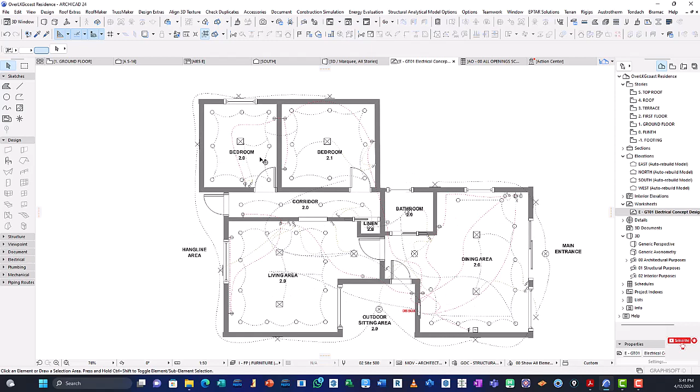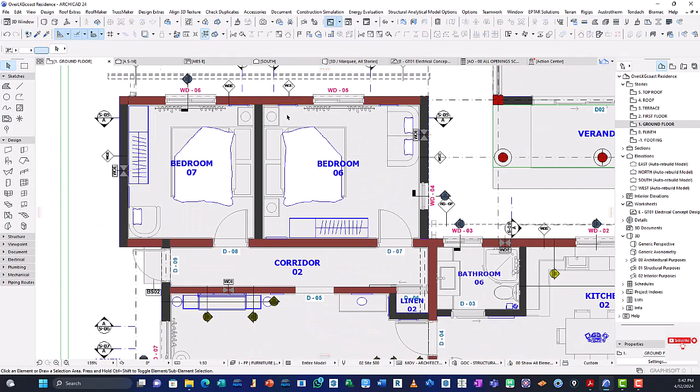So our agenda today: I don't want this video to be as extensive as it can get. I want to keep it consistent and concise. There's a lot to talk about for the past 3 months, about how the project has evolved throughout all this time that I was off, because this is what I left. This is the last session, the last time I closed the project. This is how far I reached in my work.

So we're gonna first start with this. This is a section detail. A section detail is a section that is mostly concise, limited. They're not like a simple architectural section. A section detail, as the name says, gives you just a simple detail, either of your window or of your wall, or, let's say, of your furniture.

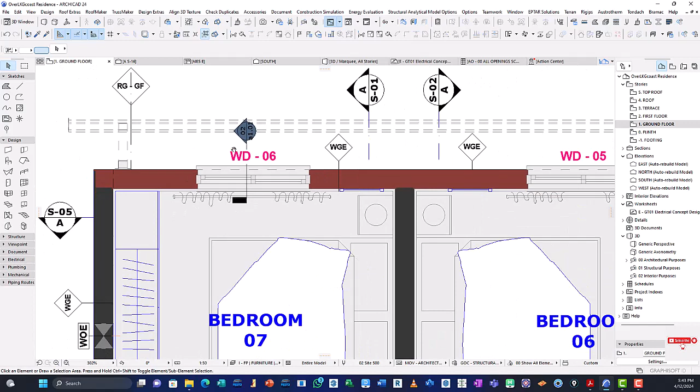So what I'm gonna do here, I'm gonna show you how I made it, because in ArchiCAD you're never gonna find a section detail. There's section, true, but there's no section detail. In ArchiCAD you can only find a plan section detail, meaning that it's not dynamic. You cannot open it. You can just modify it based on its texture or color, but not based on its dynamics or its view.

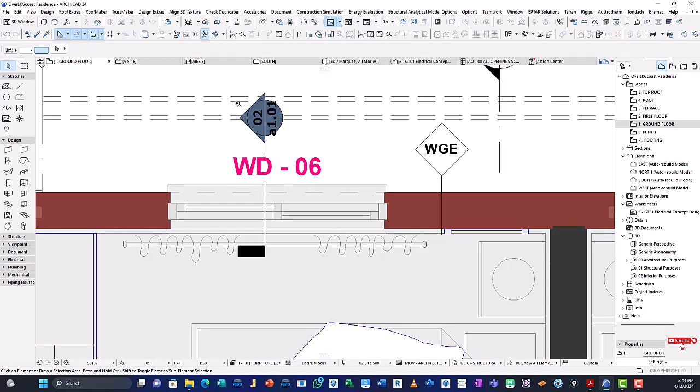But this one is an ArchiCAD section. It's dynamic, true, but it is a section detail. So how did I come up with this symbol and call it out to be a section detail? The way I created this symbol, I know you're gonna bear with me.

I'm gonna scroll a little bit, then we're gonna go to the first floor, because this is what happens when you create a section in ArchiCAD. Let's say, for instance, if I created this section on the ground floor, the AS01, it has to replicate in other floors, so it has to appear in other floors.

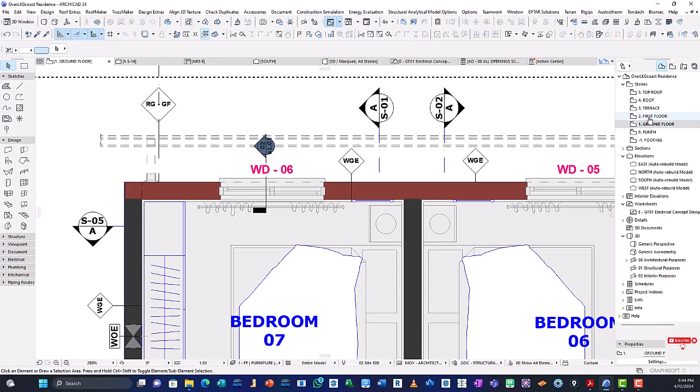For instance, if I go to the first floor, you see that this section will appear, but the one that we created as a section detail disappears. And the thing is, we still maintain the same layer combination. You're gonna say, oh no, how come, Jerry? Probably you created two different layers, one for the section and the other for the section detail. Yeah, that might be true, but it's not really the reason.

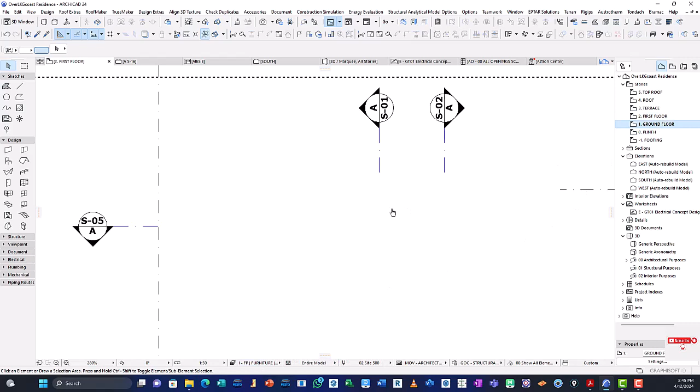Based on this fact, what I did here is very simple. Though it's an ArchiCAD section, the mere fact that it appears on its ideal floor and not on the others is because I tweaked it a little bit. What did I do here?

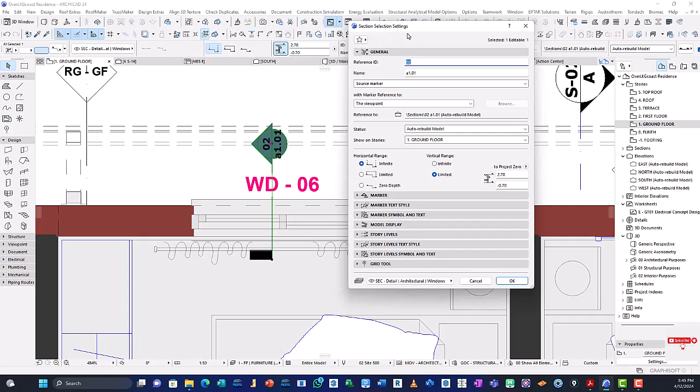I'm gonna click on it and press Ctrl+T to open the settings dialog. Let's give it a second there. The settings will appear. Once the section selection settings dialog appears, you will see there's a section that says horizontal range. This gives us the range of your section from a horizontal point of view, and this one gives us the range from a vertical point of view.

You will see that in the vertical point of view I said limited, because I want to limit it, keep it concise, not too extensive. In horizontal, I say it's fine, keep it infinite, as wide as it can get. You'll see that I pointed here when it comes to the section view of this section. I said just limit its vertical range to the height of 2.7 and to the depth of minus 0.70, and the unit is in meters.

You'll notice here where it says show on stories, this is how you show your section on the floor plan. This dialog box, by pressing the down arrow, shows you how you can visualize your section on the floor plan. Will you visualize it on every plan? If I click on all, or if I click on ground floor, meaning only on the ground floor, or a browser can choose one story, but in my case I've chosen the ground floor. Then click on the ground floor story, and click on OK, which means I maintain the appearance of my section only on the ground floor, not on other stories.

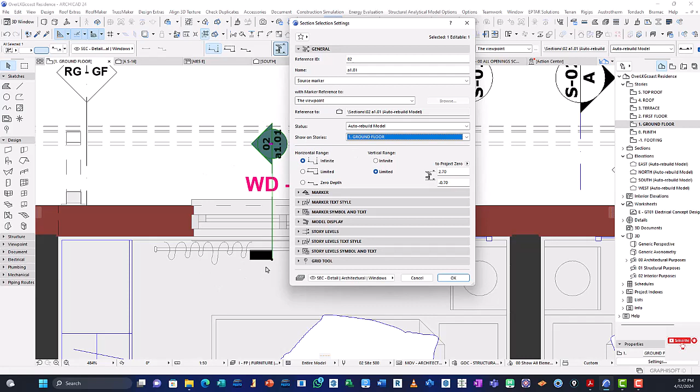That's why when I went to the first floor and clicked on it, this section didn't appear, because of this setting. After tweaking here, you'll be able to keep your section, I mean your section detail, only to the ground floor, not to the other floors.

After setting the section symbol into place, what I did next is to create this blackish tail that we are seeing here. To create it is very simple. When I click on it, you see that it's just a simple fill. It doesn't have a mass.

It's just simply putting a fill. It's just a fill, just a representation of something. But in our case it plays the role of a tail to our section, because I've never seen this kind of section representation symbol in ArchiCAD.

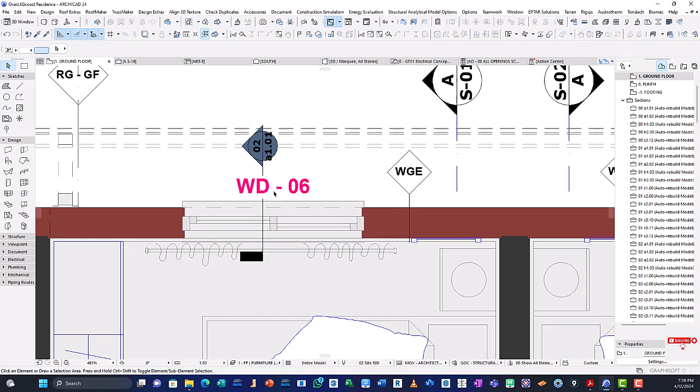So I had to create this one to set a distinction between the longer range section and the section detail, because most section details have this symbol, or they just have the head and the section line. But in most cases, because of the structural work, you find sections, section details represented this way.

What I did next is create a layer for both of them. I created one layer, meaning that if that layer is off, both the tail and the head go off. You can see here the section layer, I put it in a layer called section detail architecture for the window. That's why you can see this section set on the window.

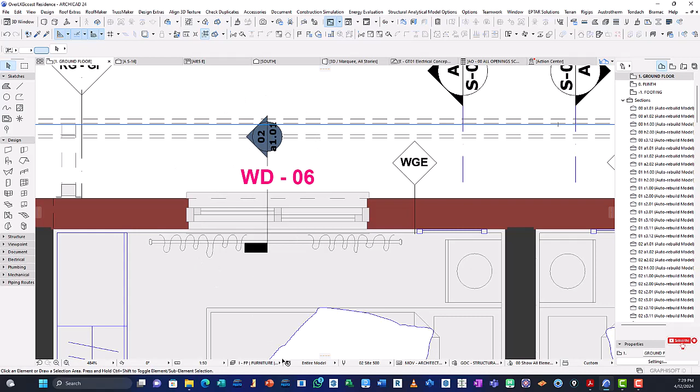When I click on this fill as well, you will see that it's the same layer. So each and every time that layer goes off, this section will go off as well, as I'll show you by opening the zone layer combination. If I click on the zone core layer combination, you see that the section goes off. So then let's just go back.

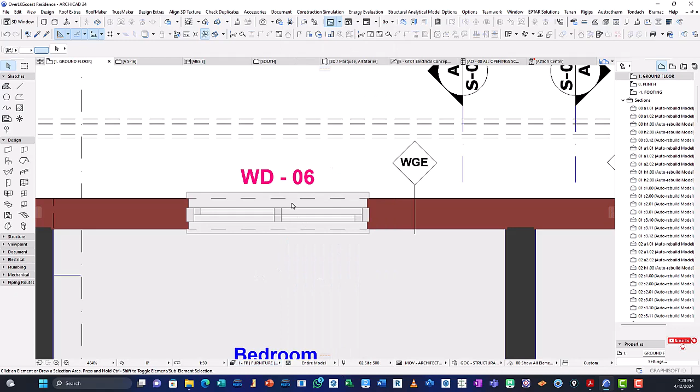Let's go back here in furniture interior. Then the section comes back with its tail. So that's how you do it.

However, for the other architectural section, they will be able to be displayed on other floors. If I go to the first floor, you see that this will still appear, but the other one will disappear, because the section detail was only made for the ground floor.

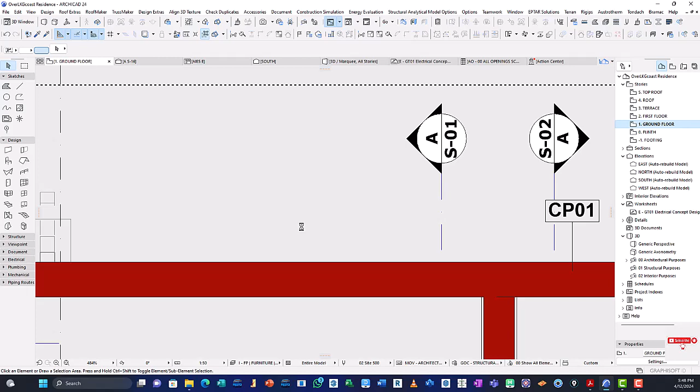So this is it, and you'll notice now there's a marker. I just cut this marker to limit our working flow, so we'll just be working on this space, not going into other spaces, because if you recall, I posted a video in which I explained why I'm limiting my workflow to this house, this building, not the other one.

Because I've signed an agreement with the client. The client came up with that agreement to say: you can touch everywhere in this project, but don't show my main building. I'll allow you to do whatever you want with the cottage, the visitor's house, but don't touch my main building. I said yes. There we are, that's why you're seeing this.

So what I'm gonna do is open the marker, the trade view. Another thing you'll notice is there's a bit of color. Maybe you've never seen this elsewhere, probably it might be your first time.

What I did here, these colors you're seeing, is because my layer combination is activated. I've activated the layer combination and chosen the one called 'structure non-load bearing transparent.' So once I've chosen this layer combination, this will be the appearance of my floor plan.

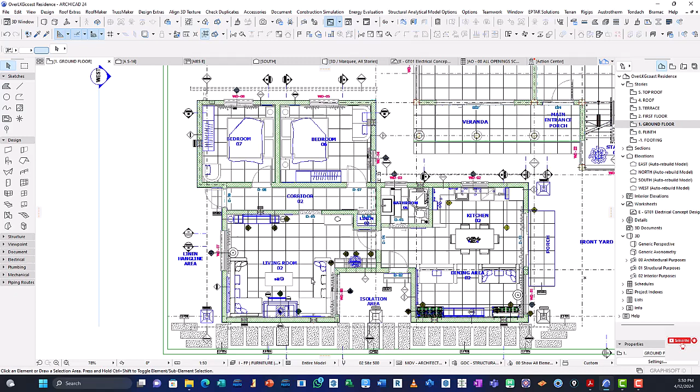But if I switch on by choosing a layer combination here, if I choose the one that was previously set, you see that the appearance of my floor plan will automatically change and go back to the one it was originally. I think I pretty like it, so we're gonna keep it throughout the whole session.

After explaining this about the layer combination, you can even change the model view based on what you are showing. I'll come to that a little bit, but not today, probably in upcoming videos or tutorials. So for today, we're gonna keep it simple, not complex.

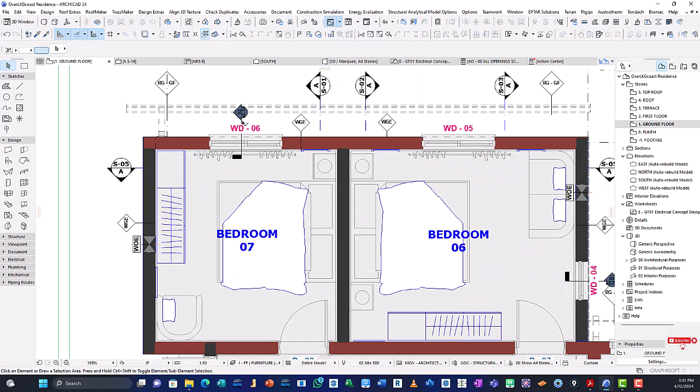After showing how I did my section detail, then we're gonna open it. I think probably not today, next time, because there are a lot.

If I click on section, you can see all these are section details from 00. If I scroll down all the way, all of them go into 14, 16, 17, up to 21. All these section details, from that zero I showed you all the way to 21, are the normal architectural sections.

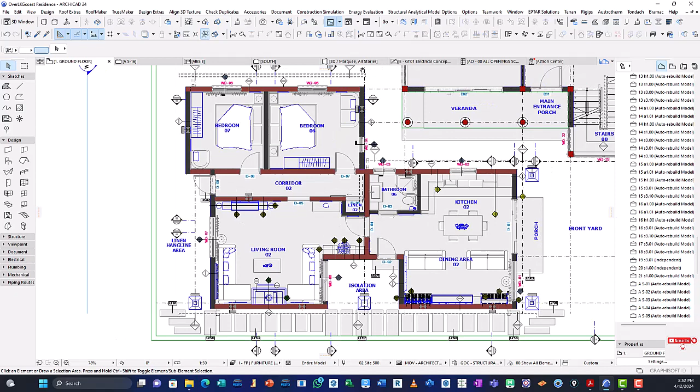So what I want to show you here, let's open the 3D view and see how our building is looking. So this is our 3D view, our marquee 3D view, kind of a cutout, a call out if you're using Revit, but a marquee with ArchiCAD.

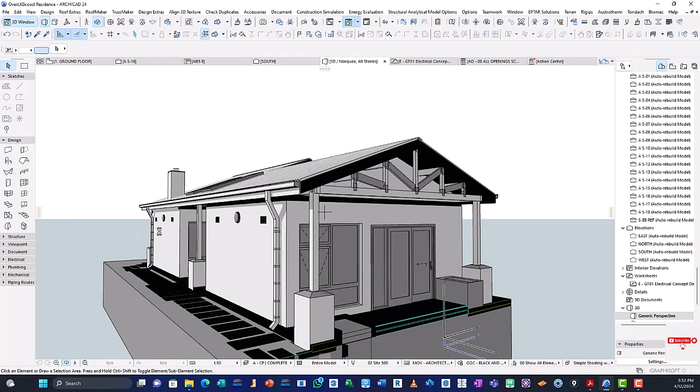So what I'm gonna do here is we're just gonna go through it, right? We're just gonna run, orbit a little bit, check a few things, and pan a little as well to see how our building is looking all around.

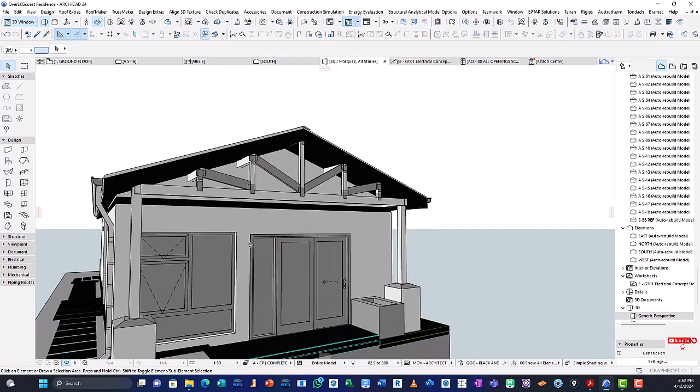Just to have a view of how it's looking since the last time we kind of, I'm not gonna say abandoned it, I'll say left it. Yeah, this is how it's looking, this is how realistic it is. Then you're gonna ask me another question about the color and representation of my building. I'm gonna point you down to the graphic override again.

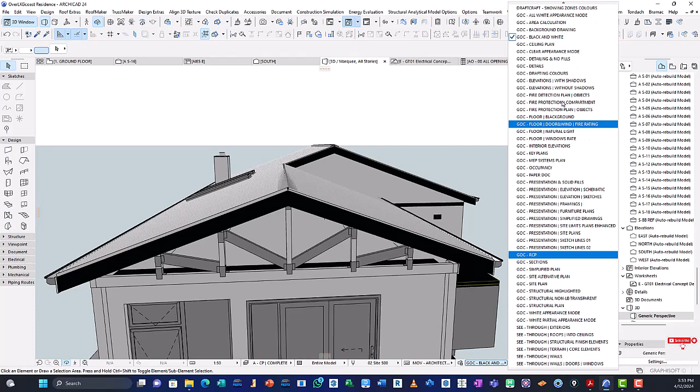This time it's normal, the one we've chosen on the floor plan, this structure. It's now black and white. That's why my floor plan and 3D view look kind of black and white, though there's a bit of gray, but it's mostly black and white. This is because I've used the graphic override.

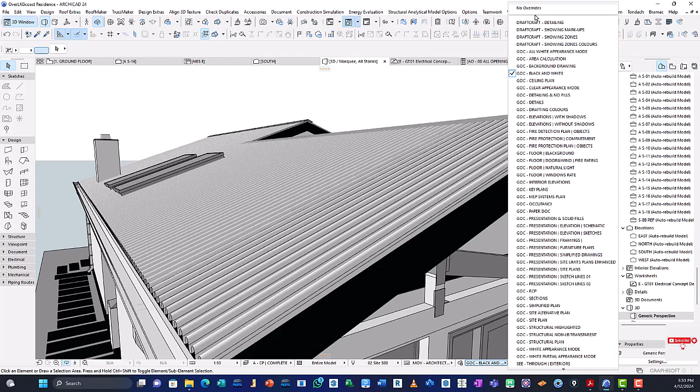If I switch off the graphic override by clicking on no overrides, it goes back to the green wall and gray roof around. They take their original color. Because I've activated the graphic override, this is the view that we get.

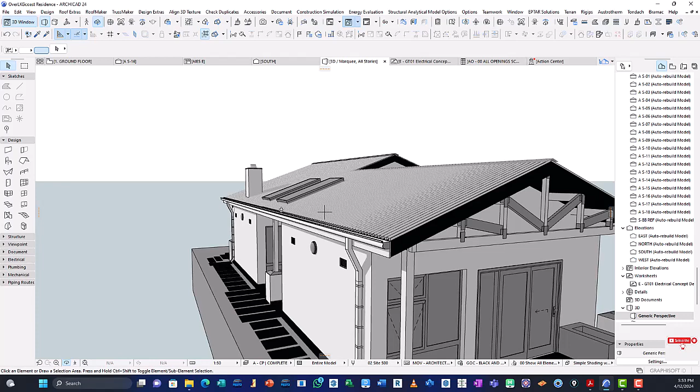So let's have a tour, let's enter the building and see whatever is inside. As I enter the building, oh, it's all white. As you can see, it's all white. You will see there's a little bit of a difference between this counter and that one - this counter is more white, the other is more gray.

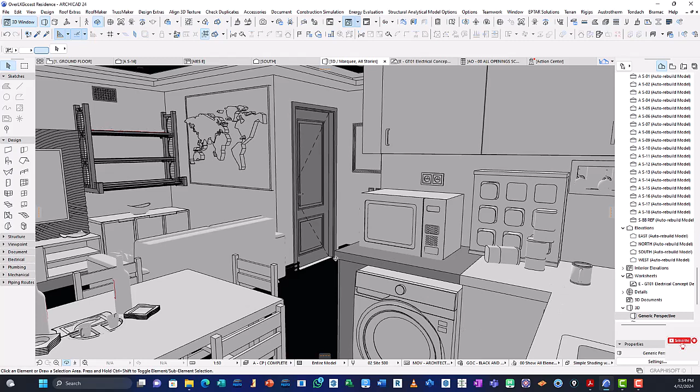It is because of the graphic override rules. The different rules I've set in my graphic override will determine the appearance of my building element types, or my objects, the different elements I've used in my project.

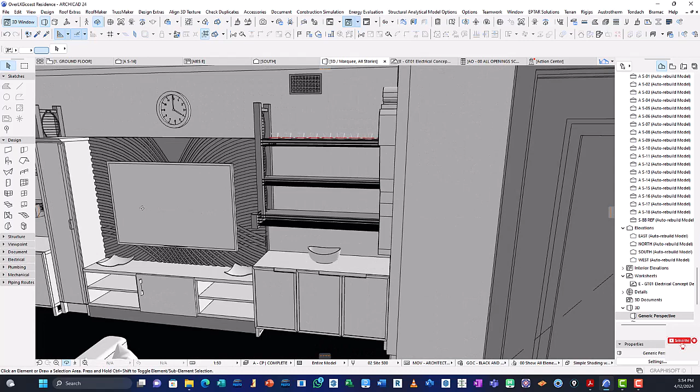So the graphic override is mainly a different way of viewing your building - different ways of viewing your building. You can view it with this color, with another color, with this aspect. You can change the aspect based on what you need, based on your requirements.

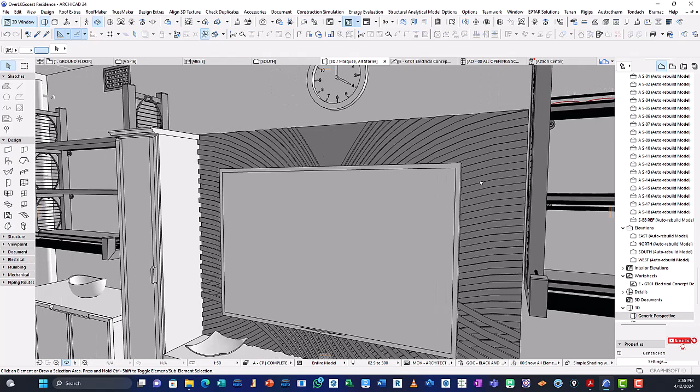I know it's all white. Let's stand here a bit and see how the building is. We're having a TV here, I think is what I did here. I came up with that creative mind of creating new things.

As you can see here, this TV stand, I designed it. The whole TV stand I've designed. Oh, I'm in the ceiling.

Let's go down, let's scroll down like this. As you can see here, the TV stand I've designed myself, the whole TV stand, all these patterns around. I wanted to bring forth that creative mind in designing things.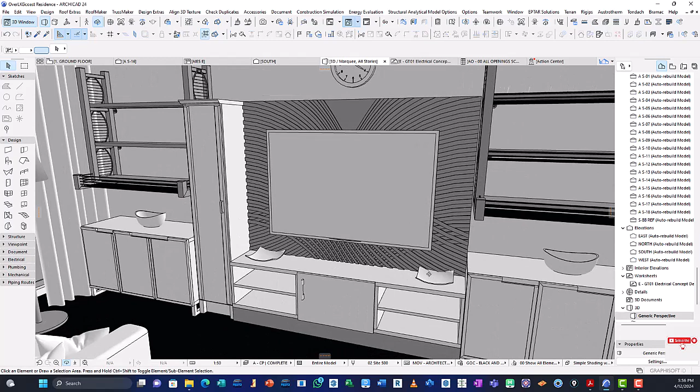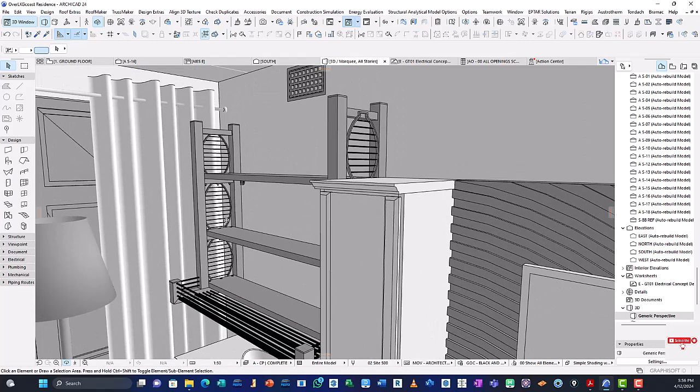Most of my designs, I like not only using objects, but using my creativeness, bringing things alive, such as this shelf - these combinations of wood and steel that I've created to bring that environment of support and a shelf keeping space for books and other things. If we click escape twice, you can see that they're made of morph.

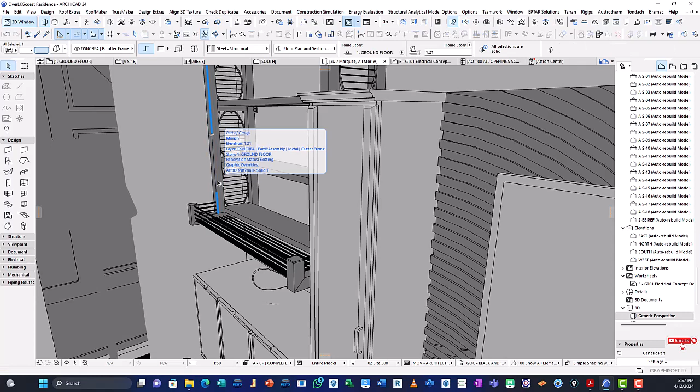They are morph, made of a lot of morph elements. If I zoom in, let's go a little closer and orbit around, orbit like this.

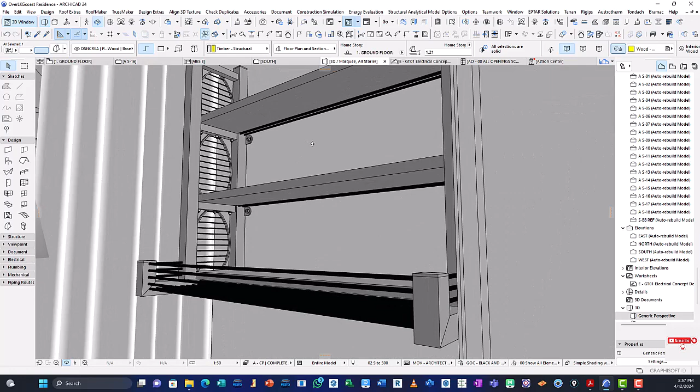You see the bolts there, they are embedded in the piece of shelf wood. They're embedded, so even on the wall, the wall mounted - you can see the bolts there, every bracket around, and the connection of it.

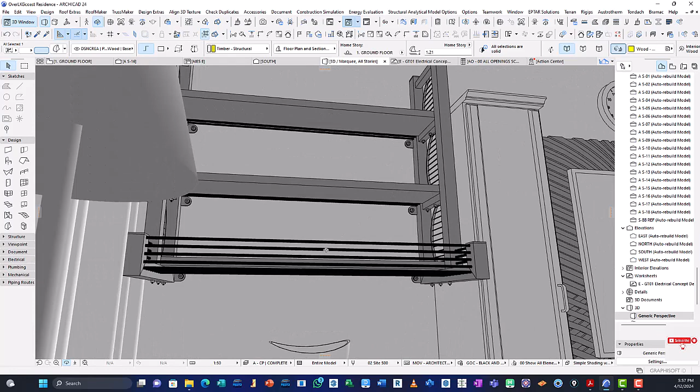I really like it, I really like being creative like this, creating new things. Being able to bring things that you have designed on paper, bringing them alive - it's really mind blowing. And it pushes me to seek more and more knowledge.